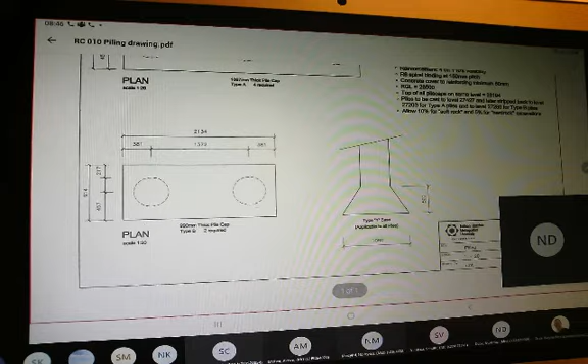No, it's not that one. No, I need to get into another one. No, I can, let me work with that. Let me look at that one. Okay, when looking at this drawing, I actually need to take that out and go out of this and share the other one. This is what new toys does, it messes with you so that you cannot do that. And now I will.

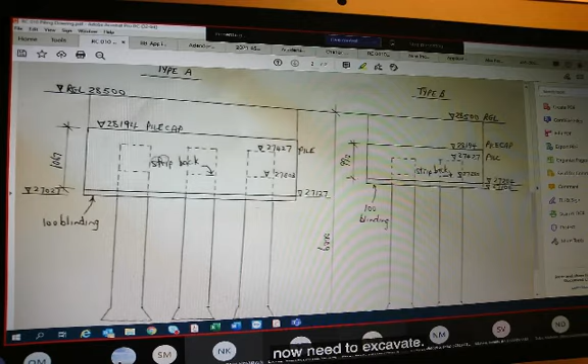And what I'd like to point out here is the fact that we now need to work on these pile caps. You can see the top of these pile caps, they are the same. The tops of these pile caps are the same, and they both reflect that they are at 28194. But I need to excavate for them, and I need to go down. If we have a look at the depth we need to go down, we'd have to go down from there, to the bottom of my pile, of my blinding that I need to excavate to. So in excavating to that level there, it means that I now need to do certain things.

We already stripped back our pile caps. So I now need to go to the bottom of that level of 27027 on the one side for the type A pile, and to the level of 27104 on type B pile. So when we're dealing with that, when we're now going to go and look into it and bring out our excavations that we have, that will then bring to us the section that we now have to go into doing our excavation, ensuring that everything that we have in there is.

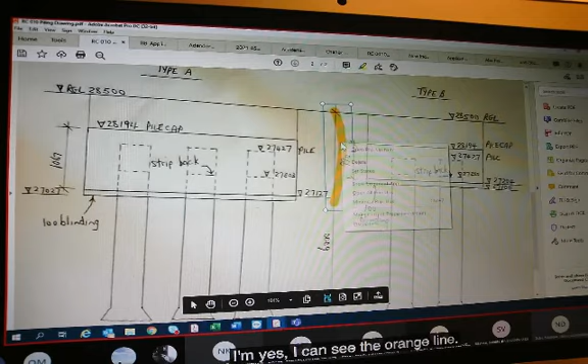Yes, sir. I can see the orange line from the ground level to the blinding. Okay, so you can see that, but you cannot see anything other than that.

But now when we're dealing with that, when we're having to work down and excavate down, we now need to determine what that depth is, and we will have to then say that it is the 28500 minus the 27104. That gives me a depth of 1396 that we now need to excavate down to.

That is for type B, and we have 1473 that we need to excavate down to for type A. And we will do that and show that in our drawing, as I just flip over into my dimensions, to say we need to go from there to the bottom there, and from there to the bottom there.

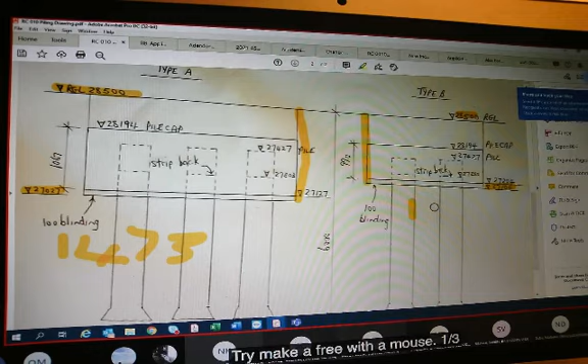And we'll say that minus that, and we'll also indicate by showing that it is that minus that. And our depth that we would have there for type A would be 1.473, and for type B, we would have 1.396. So that would be our excavation depth that we would have on the floor for the two types.

And obviously we know how many we would have, and then when we go out, I'm going to take that out and I would upload my Excel spreadsheet. I need to take that out and you can see my spreadsheet.

You guys can see my Excel spreadsheet? Yes, sir, we can see it. Okay, you can see my Excel spreadsheet.

So that is where, as you see, we excavate in earth for pile caps not exceeding 2 meters deep below ground level. It's important that we indicate that it's below ground level, and then extra over for excavation in soft rock, 10% thereof, and ditto for excavating in hard rock, 5% of whatever the excavated volume is. We need to allow for that.

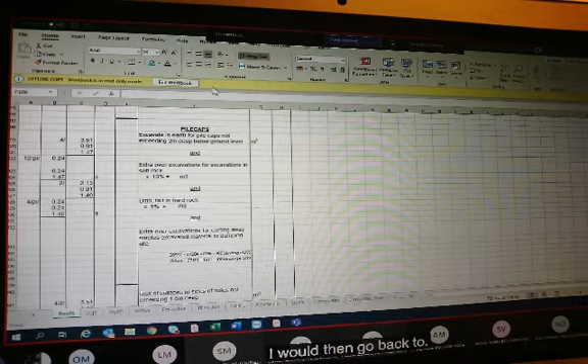Our dimensions that we would have here is, and that we would find from my drawings, which I would then go back to, then be from my drawing as I go back to my drawing. My dimensions would then be 3505 by 915, so it's 3.51 by 0.91, and the depth for my type A is 1.47, and I have 4 of those.

But at the same time, as we have a look at those pile caps there, let's have a look at those pile caps, and we also would notice that they now have been reduced. We've stripped them all back, as we can see over there. We've stripped them back, so we now also need to deduct that, and that is why we're doing this, we're going into the timesing column.

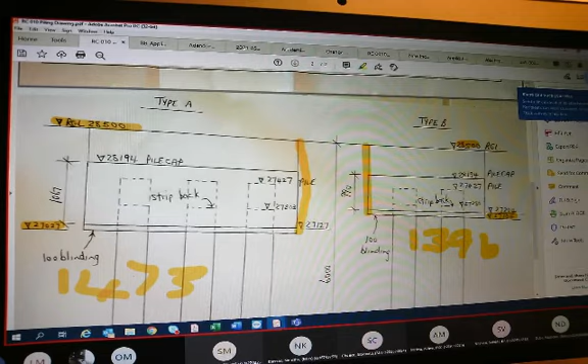Yes. I wanted to ask, why did you use the height of 1.47 when the pile cap only starts below that? Why did I use 1.47?

That's a good question. I've been asked that's why I'm saying these things, so that you can talk to me and tell me what it is that you are thinking at this point. So, what do you think? Is the 1.47 the height there? Is it correct, or what should that height be?

I think so. You must take the level that you've been given from the pile cap, which I can't see that. I think it's 27,427 to 27,027 to get the height that you're supposed to subtract by.

You say I should use 27,427 minus 27,027. Yes, sir. So you're saying it should be 0.4 and not 1.47.

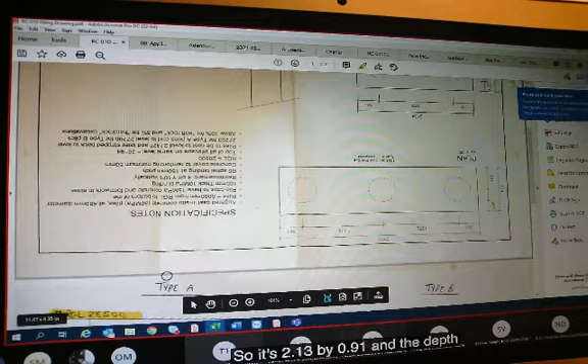And we also add, when looking at the sizes of the pile cap type B that needs to be deducted, we have those sizes as 2.134 by 0.914, so it's 2.13 by 0.91. And the depth that we've indicated there is 1396, but the 1396 is reflected as 1.4 as we write it to 2 decimals only, so that will be by 1.4.

And we will be deducting again the piles. It will be 0.24 by 0.24 by what's my next dimension now? It is 27,427 minus 27,104. That gives me 323. So it will be 0.24 by 0.24 by 0.32 times pi times 4, because we have two of those sets of piles as per the information given on the drawing, and that will be multiplied by another 2. So in total there will be 4 of those piles that we need to deduct.

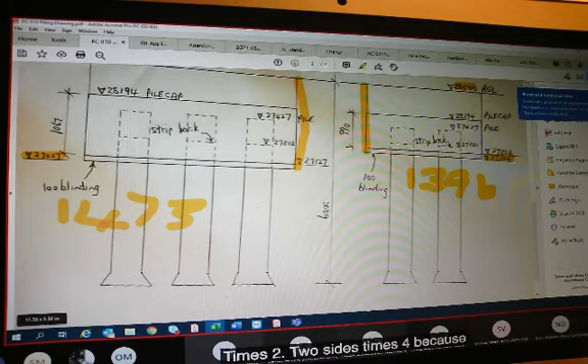And for these, we also now need to do risk of collapse for these pile caps. How will the risk of collapse be? If I have a look at my depth that we've ascertained, the 1473 and the 1396, we now have that. We need to do the risk of collapse to those. So my dimensions will be the same, I will not be interested in anything other than the depth that I've excavated, which would be 1473 and 1396.

So my risk of collapse would then be 3.51 by 1.47 times 2 sides, times 4, because I have 4 of those pile caps. And then 0.91 by 1.47 times 2 times 4. That is all for my type A pile cap. For my type B pile cap, it will be the 2.13 times 1.4 times 2 times 2, and 0.91 times 1.4 times 2 times 2.

So that was for my risk of collapse. All with me? Everybody with me? Right, I see there's a thumbs up, okay.

We then have one of our favorites, which would be my keeping excavations free from water, and that's measured as an item that we need to do.

So now I will have to measure the concrete that goes in there. As I look at that drawing, I can see there is concrete in there, and I see that the concrete is separated into 2 sections. One is blinding, and the other one would be my reinforced concrete. So it will be 10 MPa concrete, and whatever the size stone is that we will have, whether it be 19 millimeter, 13, or 25 millimeter stone, in blinding below my pile caps cast against my excavated surfaces.

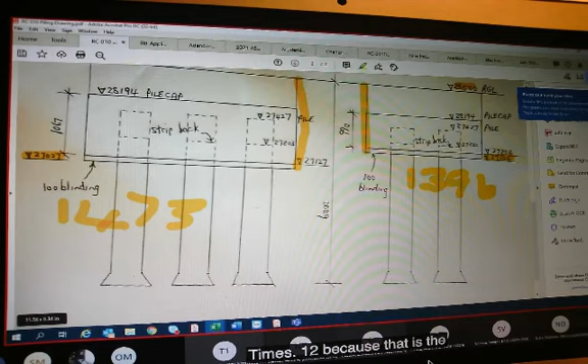My dimensions, I can do this in one of 2 ways. I can say 3.51 times 0.91 times 0.1, and I have 4 of those sections of blinding, but I will still have to deduct the piles that protrude through the section where I'll be casting the blinding, and that will be 0.24 by 0.24 by 0.1 times pi times 12, because that is the number of piles of type A that will protrude through my blinding.

I then also have 2.13 by 0.91 by 0.1, and I then deduct 0.24 by 0.24 by 0.1 times pi times 4, because 4 is the number of piles for type B pile caps.

In total, and with that, going with that is, I'll then also have to do my concrete. My 30 MPa 19 millimeter stone reinforced concrete in pile caps, partly cast against our excavated faces. Why partly cast? Because part of that is cast on top of my blinding that you see there.

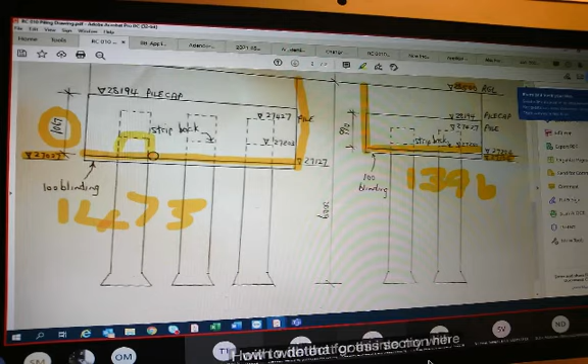And therefore, I'll be using the same dimensions that I had for my blinding. So it's 3.51 by 0.91 by 1.07. Where do I get this 1.07 from? It is given to me as 1067. When I now convert that to meters, and write it to 2 decimals, it will be 1.07. And there's 4 of those pile caps.

But I also have to deduct, for this section here where the pile goes into my reinforced concrete. That will be 0.24 by 0.24, and I need to determine what that height is. That height is given to me when I look at the levels. The levels would then be 27203 minus the top of my blinding or the bottom of my pile cap, 27127, and that gives me 76 millimeters.

So I will then multiply that by 0.08, what needs to be deducted. That height there is 0.08, and that is times pi times 12 of them.

The same token, I need to calculate the reinforced concrete in the type B pile. The dimension given to me is 990 millimeters, or 0.99. So my dimensions would be 2.13 by 0.91 by 0.99, and I have two type B pile caps, so my quantity for the concrete is times 2. I have to deduct the protrusion of the pile into my pile cap, which is 0.24 by 0.24 by 0.08, as it comes down to the same height that it protrudes through into my pile cap, times pi, times 4 of them.

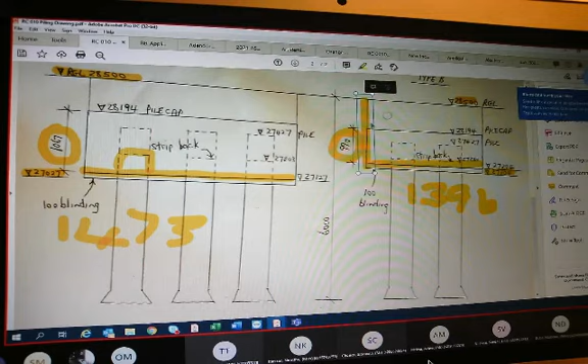Now, we said that when measuring formwork, we get different types of formwork we could measure. When I look at this drawing, generally when my pile caps show, they reflect that they will be exposed to the outside, because piles and pile caps are normally designed to go in areas where the footing or founding material will not be strong and firm. So this concrete would be exposed for the duration of time that the structure stands there. In most instances, we would measure for smooth formwork to the sides of the pile caps, because it would be exposed, and you'd want that finish to be aesthetically pleasing.

So when we measure smooth formwork to the sides of our pile caps, it will be measured in meters squared. In measuring that, we'd also look at back excavation of the vertical sides of the excavation in earth for working space exceeding 500 and not exceeding 1 meter 500 deep, for placing and removing the formwork to the sides of the pile caps flush against the excavated face.

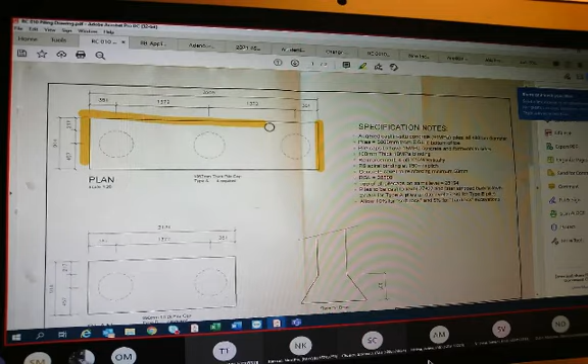What does that mean? It means that when we're looking at this from the top, that would have ground up against it. But we need to ensure that the formwork can get in there, that the support work goes in, and we need to allow for working space in order for us to get that formwork placed in there. That formwork would be going in at the bottom here, going down here. That formwork needs to go in on the side, and then we need to create working space for that.

And when measuring working space, we know that it's measured in meters squared. The standard system tells us it goes in exceeding 500, not exceeding 1 meter 500, exceeding 1 meter 500, not exceeding 3 meters, and that is how we measure for our working space.

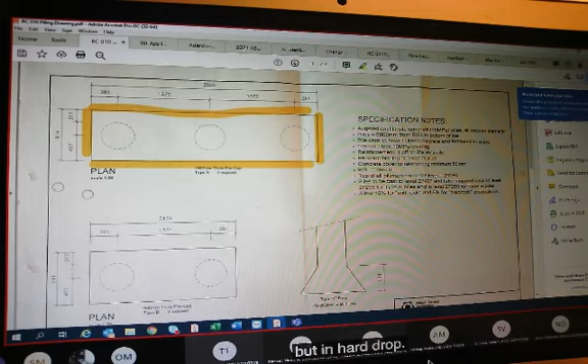We also have to measure extra over back excavation for working space for excavation in soft rock. Why? Because our instructions say that everything we do dealing with excavation, we need to allow 10% for excavating in soft rock and 5% for excavating in hard rock. So even when dealing with working space - what is working space? It means the contractor is allowing for his or her workforce to be able to safely work in that area, and we need to ensure it is allowed for. We know that 5% of the soil would be hard rock and 10% of that would be in soft rock. So we include that when we say extra over back excavation for working space for excavation in soft rock, times 10%, and ditto for hard rock.

Now let us have a look at our dimensions. Our dimensions tell me we need to measure for formwork for the 1067 and for the 990 over there. So it'll be 3.51 times 1.07 times 2 times 4, and 0.91 times 1.07 times 2 times 4 for type A. And for type B, we're looking at 2.13 times 0.99 times 2 times 2, and 0.91 times 0.99 times 2 times 2. That, ladies and gentlemen, brings us to the end of my dimensions for the measuring of the piles together with the pile caps for drawing RC010.

I'll now allow a couple of moments for us to ask questions and move through. Any questions? I don't see any hands.

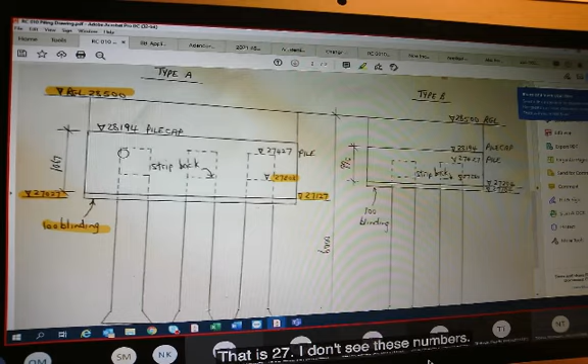Yes. So, sir, before that 100 millimeter blinding layer, so what is that? How do you think that depth? That is 27, I don't see these numbers. Can you not see my screen? Yes, can you, I don't see them well.

You see the level there is 28,500. That's a reduced ground level. Okay? Can you see this 27,027? That is in yellow. Yes, and then how did you get that one? I said 28,500 minus 27,027.

You punch in your calculator, punch in 28,500 minus 27,027. What do you get? 1473. Yes, sir, now that is the excavation depth, because we cannot fit the blinding if we've not excavated to below the level of the blinding.

Yes, I can see that. But I think I need to know, how did we get that 27027? That level is given to us. It's on the drawing. The level is given to us at 27027.

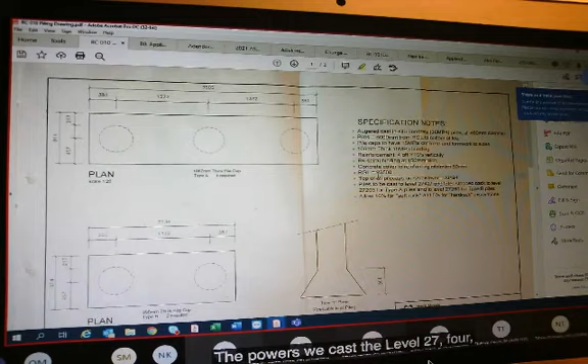27027. Yeah. Is it on the specification, sir? It's on this drawing that I've also uploaded, the one that you see here. I've also uploaded this onto the MS Teams. Okay, I think I'll go back and check. I can also, let me just...

If you have a look at what the drawing says, this is what we did. The piles we cast to the level 27427 and later stripped back. We're given that 28,500, which is ground level. It says that the piles are 600 millimeters from reduced ground level to the bottom toe.

Yes, okay. Right? And then, but we were also given, and here we say that the piles, that giving the level at the top of the piles for type A, and we are given those levels. That is for the piles only. Then the next drawing that we have, which I have also uploaded, is this one that shows where these levels come in. The details of all of those, it shows on there where we get those respective levels from.

All right, no, I can see. I thought that this one was just showing how these levels that are specified on the specification. No, the levels, this drawing was also given as part of the upload. Okay, no, I can see it now. Okay, thanks, so you have that now.

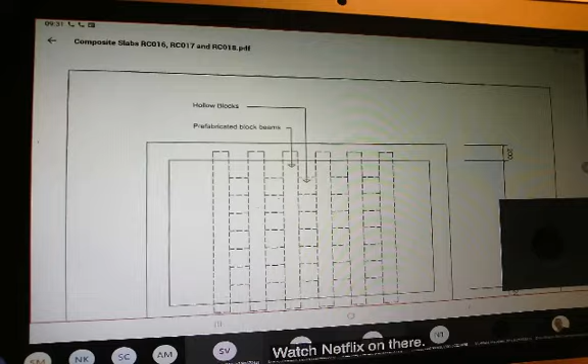That would take us into composite slabs. If you go into your MS Teams, you'd notice that I've uploaded a range of drawings and workings out that I'll show you quickly. You'll find it in files, in class materials, the first one at the top that says Composite Slabs RC 016, 017, and 018. If you open it and go in, you'll see there are hollow blocks, a drawing that shows rib and block slabs with the workings, also shows trough slabs with the workings, as well as hollow block coffered slabs with its workings.

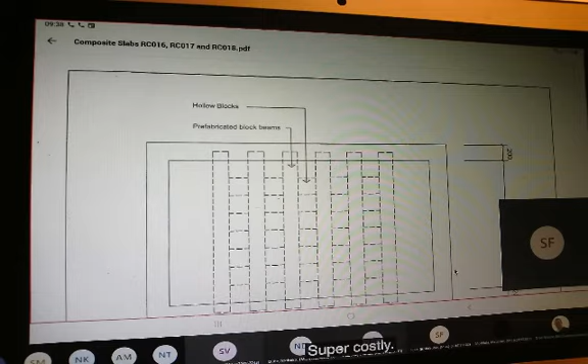Okay, right guys, I'm back. Before we start out with this, I'd like to know and check on this: do you guys, when you access YouTube videos from a link, use a lot less data than this live streaming? I wouldn't have a clue, but I'm asking because I'm trying to venture into doing something like that. Do you guys know, you don't use lots of data when you do YouTube streaming and that, do you?

Okay, because I'm looking at venturing into doing videos where you can see me, where you can see where I work through it all, and uploading them. I'm uploading the links for you to watch on YouTube. But I don't have much hope for myself with that, but it's something I'm going to try. I'm sure that I'm not too stupid as far as that is concerned, and I will try with the needed assistance.

I will try and do that. Okay, now we've done piles and the pile caps and the like, and now I'd like for us to have a look at composite slabs. But before I want to look at composite slabs, I think it's important that we look at what the standard system says. Now, you guys know concrete.

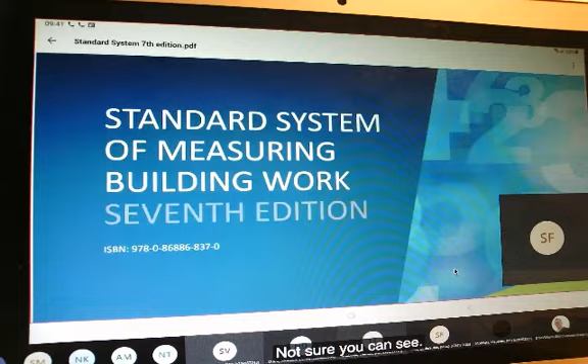You've been dealing with concrete in your third year, and you guys know the various aspects when it comes to concrete. You're aware of how concrete is measured, how it's measured in the different spaces. When I go out and try and upload the standard system here, I'm sure you can see. I upload the standard system, and we go to the section that deals with concrete.

Now we all know that we deal with composite slabs. You guys have all worked with rib and block slabs, I'm sure of this. Some of you might have worked with trough slabs, and some with hollow block slabs. Now, can anybody tell me the reason why we use rib and block slabs, coffered slabs, and trough slabs? Anyone want to venture a reason for using those? Anybody?

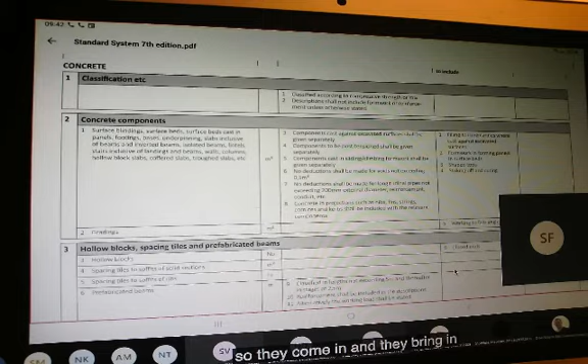If you look at the composition of a hollow block slab, or even a trough slab, or a coffered slab, you'll notice there is a lot less concrete being used. Concrete has weight, and concrete is also expensive. So they bring in hollow block slabs, trough slabs, and rib and block slabs to reduce the weight of our concrete, as well as to reduce the cost of that concrete.

For instance, if we have a 300 millimeter thick solid reinforced slab, it will be a lot more expensive than having a coffered slab, or even a rib and block or a trough slab. So we're using that to reduce some of the cost, and it also helps in some instances to expedite the curing process.

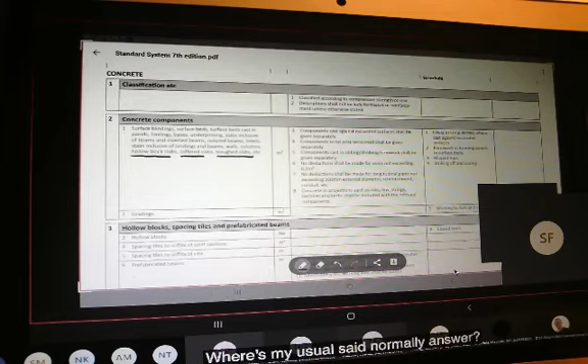So when we look at concrete, first off, we know that concrete is measured by its components: surface blindings, surface beds cast in panels, footings, underpinnings, slabs inclusive of beams and inverted beams, isolated beams, lintels, stairs inclusive of landings and beams, walls, columns, hollow block slabs, coffered slabs, and trough slabs.

Can you see the lines that I'm drawing there? Where's my usuals that normally answer? Yes sir, we can see the lines. You can see the lines that we've drawn there.

Now you can see that they mention these slabs separate to the one that shows slabs inclusive of beams and inverted beams. So when we measure them, we will not include them in the same description as a slab of a concrete structure that we would have done in third year. So we measure them separately. It is measured in meters cubed, and the components cast against excavated surfaces and so on. We'll go through all of those in the same manner.

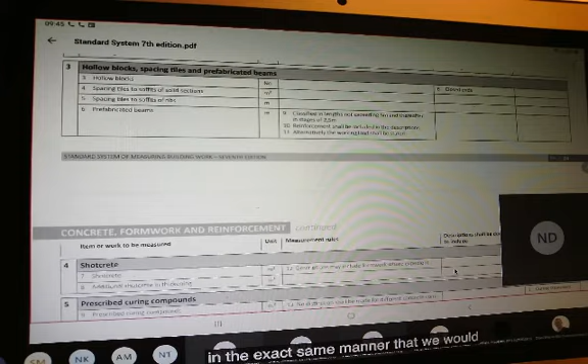So when we now go through and look at our respective sections of concrete, we know that it is measured in meters cubed. We need to indicate them separately, show each one on its own, and the rest of those would also work in the exact same manner as for our normal concrete slab.

But when we look at the rib and block slabs, we need to measure our ribs separately. We need to measure the blocks separately as well. This is where we come and see that it shows our hollow blocks, where we have our hollow blocks, we have our prefabricated beams.

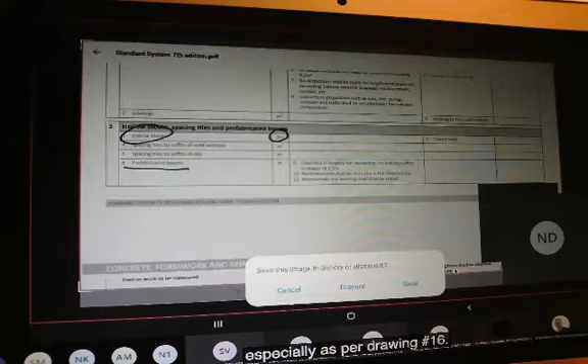We see that the hollow blocks are measured in number. The spacing tiles to the soffit of the solid section is measured in meters squared. The fabricated beams are measured in meters. Now I'm going to go into this, and there are different sections that we need to take note of when we deal with our rib and block, as per drawing number 16, which I will be opening.

This will now be drawing number 16. In drawing number 16, let's have a look at this. The next couple of drawings, 16, 17, and 18, are just a small scale. If you look at the overall dimensions, you'll notice the dimensions are now 3 meters by 2 meters. It is just a schematic to show how we would go about measuring these respective slabs, before we go into the next section that will be a little more intricate.

So when we look at this, the drawing shows us that we have a 3 meter overall by 2 meter overall. And what that shows us further is the dimensions and how this is indicated to us.

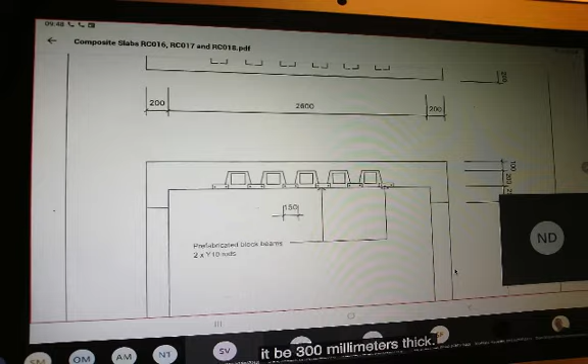We have 100 millimeter above my block. We have the block of 200 thick. And then we also have the ribs at the bottom there, and the rib widths are 150 millimeter. As part of the prefabricated block beams, it tells us that it has 2 by Y10 rods running parallel with the beam or the rib. As I said, my overall dimension, the thickness of my slab would be 300 millimeter thick.

And what else is there that we can see? You can see it shows us where the hollow blocks are and where the prefabricated block beams are given to us. This is what I want us to take note of. Take note that those are all my beams, and these over here are all my hollow blocks.

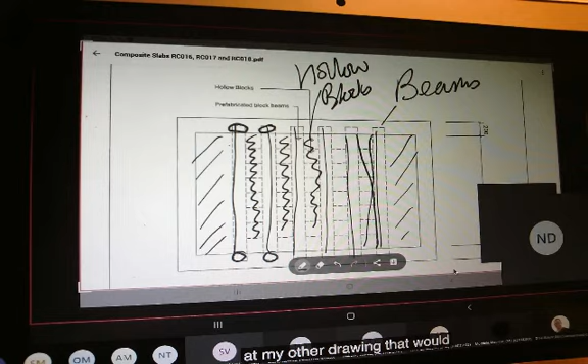And what's important, you notice that the beams sit over the concrete beams on the end, but the blocks just sit between the concrete beams. And what we have here, it means that the remainder, this here - what would that be? That would be, if I look at my other drawing, that would be part of the solid concrete. Can you see all of that?

You see all of that? You can see it's part that will be part of the solid concrete. And how do I know that? I see that over here, because what I've drawn with those diagonal lines, that's where the solid concrete goes.

Okay, we got that. So when we measure now, we will end up measuring the soffit of the slab through there, and we will have to deduct everything from there to there. Can you see that? And what will we use? We will use the dimensions of each of the blocks together with dimensions of each of the beams.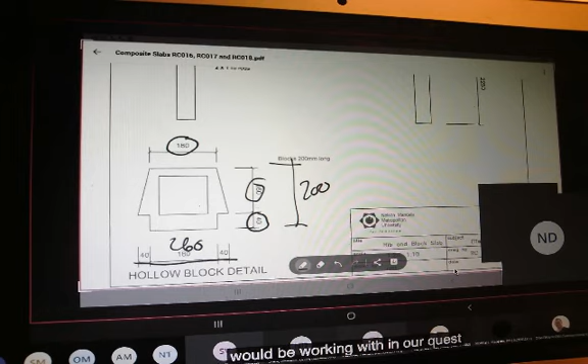As I go through, and I clear that again, I'll need to move up, and there you'll notice that I'm also given the dimensions of my hollow block, the details of my hollow block. That shows the thickness, which becomes very important. It shows the dimensions, the overall dimension of 200. It also gives me the 180 versus the 260.

That's all dimensions that we will be working with in our quest to calculate or to measure the volume of the concrete that needs to go into the slab.

I've also been given the dimensions for my ribs, the width for my ribs, and the height is given to me. Where's the height given to me? The height is given over there, as that 40 mil there, because what would happen here is

my beam would sit there with my next block sitting over there. That'll be my beam sitting in there. That is why I say that the depth of the beam would be 40, and the width is given to us as the 150 millimeter.

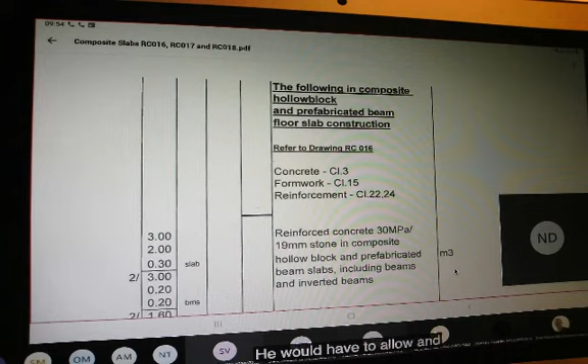All good. Right. Now when we go and when we measure this, we say the following: in composite hollow block and prefabricated beam floor slab construction. Immediately when we get in there, we're telling the contractor that he must price this, that this is going to be composite hollow block and prefabricated beam floor slab construction. We're telling the contractor that this will not be a solid reinforced concrete slab, that he will have to allow and think outside of that.

So we say reinforced concrete 30 MPa, 19 millimeter stone, in composite hollow block and prefabricated beam slabs, including beams and inverted beams.

Okay, so when I look at my drawing, when I go back to my drawing, we will now measure there to there to there and to there, because we are measuring over everything. That is how we were taught. We measure over and then we come back and we do whatever deductions we need to do.

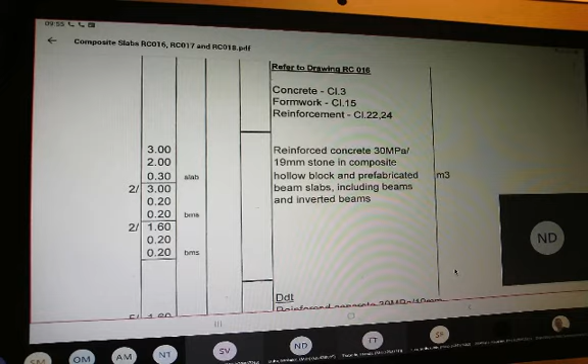Right. So reinforced concrete 30 MPa 19 millimeter stone in composite hollow block and prefabricated beam slabs, including beams and inverted beams. My dimensions there, as I said, is 3 meters overall by 2 meters overall by 300, which is the thickness of my slab.

And then for my beams, I measure my beams there as 3 meters by 200 by 200. Where do I get that? I get that over here, my beam detail. If my length is 3 meters across, it tells me there that that is 200 and my width is also 200. Tells me that my width there is 200 and that my height is 200 as well.

On top of that, I have my 1 meter 600 multiplied by 200 multiplied by 200, and I have 2 of those, 2 of each: 2 of the 3 meter beams and 2 of the 1 meter 600 beams.

Okay, all good with it. I'm glad some people are showing me a thumbs up, and I can see that there's an understanding of what goes on here. Okay, so we have that.

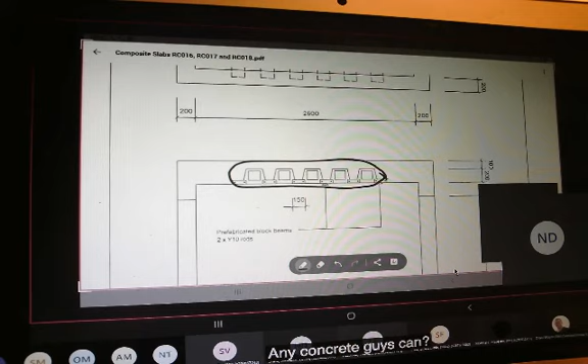But when we look at this, when I look at my drawing there, I can see that what I've measured now is an overmeasure. It's an overmeasure because I now need to, at that section there - that section will not have any concrete.

Guys, can we just pause there? The cardiologist is phoning me. I'll just need to pause quickly.

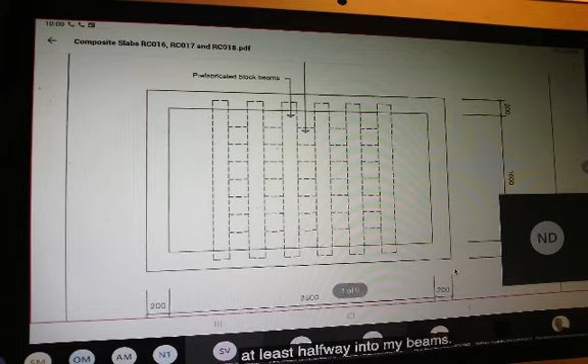We said that we're using this to use less concrete and to also reduce some of the weight of my slab. So when I go in and I deduct, I now deduct reinforced concrete 30 MPa 19mm stone in composite hollow block slab with prefabricated beams, including beams and inverted beams. And I'm going to look at, and we're going to now determine the dimensions of each and everything.

But before I do that, I want for us to again have a look at where the slab sits, or where these beams, these prefabricated beams, sit. You see that they sit halfway, at least halfway into my beams, all of them - 1, 2, 3, 4, 5, 6 of them. All 6 of them sit about halfway into that beam. And my blocks, we will now look at how we determine how we arrive at whatever dimensions they speak of. I will first of all deduct the blocks.

Now we look at the shape of those blocks. What shapes do you see for those blocks? I hope that this helps that you can see what it is that I'm writing and trying to show. What shape do you see there at the top? What shape is that? A trapezium, right? And what does it mean?

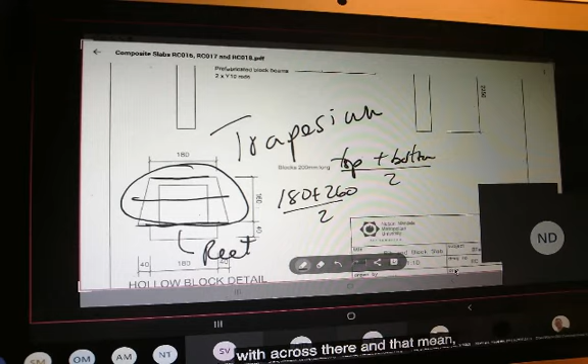When I need to determine the area of a trapezium, what do I say? That plus that - I say the top plus the bottom, and then divided by 2. Okay, all agree with me? Because I need to deduct something. And at the bottom there, I have a rectangle.

So what I need to do here, I've got 180, so I have 180 plus 260, and that divided by 2. And I will then have the mean width across there, and that mean or average width across there would therefore be - it's 440, so that is 220. Is that correct?

220, and that I will then multiply by the length and multiply by my height of 160. For my rectangle, it will be 180 multiplied by the 40 multiplied by my length. So that's what I need to deduct. I need to deduct, and let's go and see where that goes in.

So I need to deduct for my blocks. We say that it's 1.6 - across that 1.6 I get from there. 1.6 I have is given to me over there. 1.6 is given over there, and that gives me the length of the blocks that I need to deduct. So it is the 1.6 multiplied by 0.22, which is the mean that I've already determined.

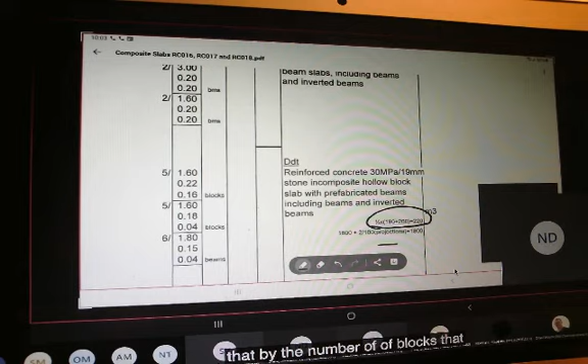And there is that mean over there - that is half of 180 plus 260 gives me 220. So it's the 1.6 times 0.22 times 0.16, which is the height. And then we multiply that by the number of blocks that we see there.

1, 2, 3, 4, 5 of them. It will be 5 that we see. You can see the blocks over there - it is 1, 2, 3, 4, 5. That is the 5 of them that we have in our total.

And whilst we're looking at that, I'm now going to look at the deduction of the beam. I'm not done measuring the block, but I'm just going to show the beam. It will be 1, 2, 3, 4, 5, 6. All understand Roman numerical - so that is there, but just so you can see for future, for where we're going to now.

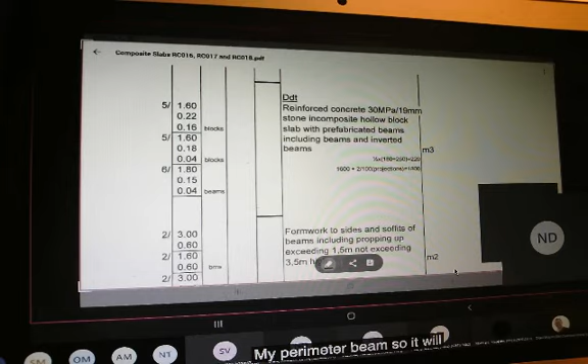So when I now go and look at my reduction, I've got my blocks - I still have 1.6 by 0.18 by 0.04. It's a 40 millimeter thick bottom part of the block, times 5.

And then now for the beams, how do I get to the beams? We said that the beams we're looking at calculating go just about halfway into my beam, my perimeter beam. So it will be the 1 meter 600, plus 2 times 100 - that is twice into the half of the beam, because the beam is 200, so half of 200 gives me 100 on either side, and that gives me a length of 1 meter 800. That's 1 meter 800 times the 0.15 times 0.04 times the 6 that we've ascertained there. Okay, also good.

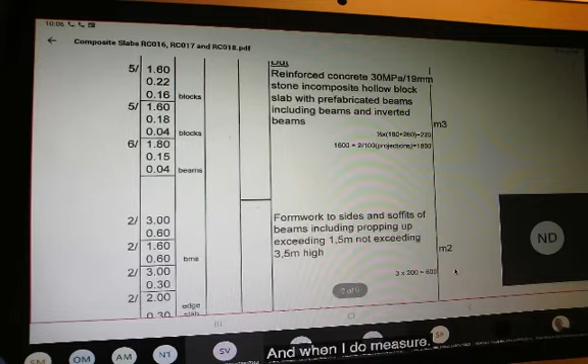Then look at the formwork, and this is what I discussed earlier when we said when I started analyzing my drawing and what I do as to where the solid sections would be, where we would have to deduct. Now my formwork - I need formwork to sides and soffits of my beams, including propping up, exceeding 1.5, not exceeding 3.5 meters high. Where do I get that from? I look at my height - my height is given to me as 2250 to the underside of the beam.

To the underside of the slab, it is 200. That tells me it falls in the category of exceeding 1.5, not exceeding 3.5 as per the standard system. I need to measure, and when I do measure my formwork, I have my beams along the perimeter there.

That would be 2 times 3 meters times 0.6. Where do I get the 0.6 from? I get it from the sides and soffits of beams. Say that's a 200 plus a 200 plus a 200. That gives me 600 girth.

When I look at my length, I say that it is 3 meters times 0.6 times 2. That is for my opposite sides. And then I have 1.6, 0.6 times 2.

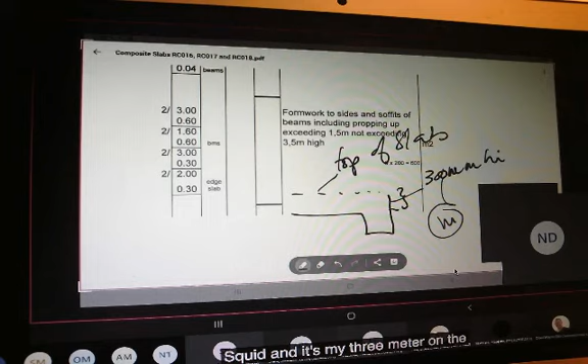It is then reflected as 300 millimeters high. But the standard system still tells me that if it does not exceed 300 millimeters high, or thick, or wide, it is therefore measured in meters. Now 300 does not exceed 300 millimeters, but 300 is on the dot there.

So we will measure that, but this is not part of edge of slab. It actually forms part of the sides and soffits of beams. That is why it is measured in meters squared. And it's my 3 meter on the outside multiply 0.3 times 2, and 2 meter on the outside multiply 0.3 times 2.

And that comes, and that is on the outside there. That is where that is reflected. The section that says it's edge of slab actually is sides and soffits of beams. Okay. All with me? Yeah, more - I don't see any hands.

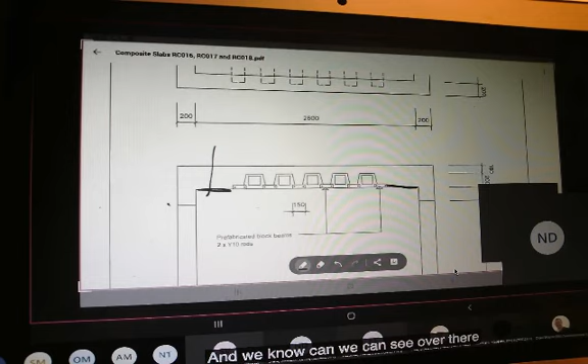We will now look at formwork to the soffits of the adjacent flush surfaces of the hollow block slabs, exceeding 250 not exceeding 500 millimeters thick. Composite hollow block slabs including propping up, exceeding 1.5 not exceeding 3.5 meters high.

What does that mean? It means very straightforward. When I have a look at my slab here, at the section of the slab, it speaks to - as I said earlier - we do have the section where there is no hollow block. And we know, and we can see over there, that it has a thickness of 300.

And the standard system tells me that formwork to soffits of slabs are measured as not exceeding 250, exceeding 250 not exceeding 500. The reason for that is it becomes a lot more costly and our supports will have to be a lot closer to one another the thicker the slab goes. So we're measuring for this section there, for the formwork to that solid section, and in measuring that we can determine what the dimensions for that would be.

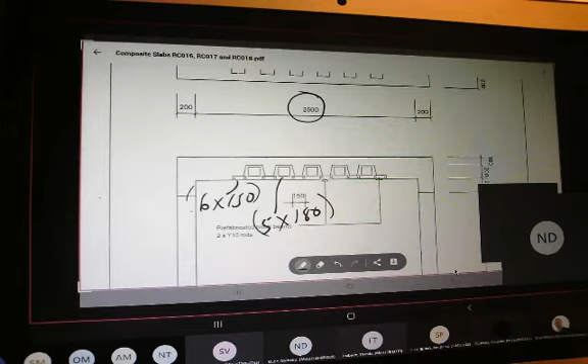And we take the inner dimensions of 2 meters 600. I want to show, we take the dimension of 2 meters 600. And we have 6 by 150. Right? We have 6 by...

Guys, have I been muted the whole time here? Did you not hear anything that I've said here now? Have I been muted the whole time? Yes, sir, yes, sir - and nobody says anything, and you can see me writing and all of that. No, don't believe this. Today's not my day. So where was the last that you guys were with me? Can somebody tell me where the last was that you heard me?

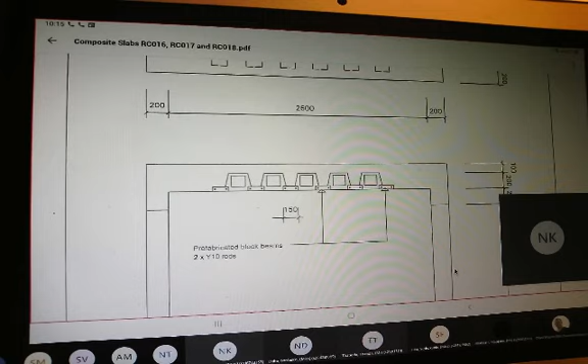When you were explaining the 3 meter by 0.3. When I was explaining which one? Nomta? The 3 meter by 0.3, I think it's formwork. So the last time you were with me was when I spoke of that section there, where I said it was the 3 meter times 300. Is that the last one? Yes, sir. So that was when I spoke of the sides and soffits for beams.

Oh my word! I cannot believe that I did not unmute my mic, and I expected you guys to speak up and tell me. You could see me writing, you could see the screen moving, but you did not think of telling me that I'm muted. Sir, I just thought that the video was lagging. You just thought the video was lagging. No, please guys, next time interrupt me and tell me, because now I've said so many things that I think I've forgotten what it is that I've said. So we spoke of...

Was it that one there? No, past that. A bigger one? Past that. No, it cannot be past that. No, it's that one. Sorry, sir.

It is the formwork, to sides and soffits of beams. Yes, sir. Okay, where I had that.

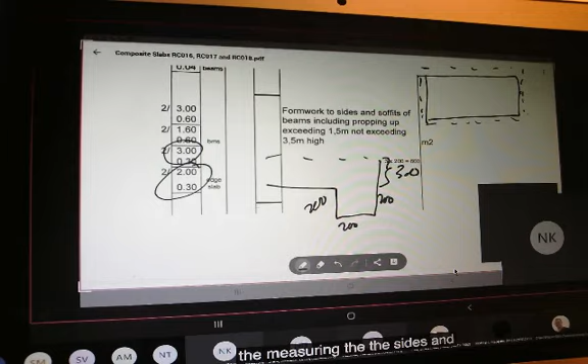And I said that there was 300, that one. Yes, sir. And that's where I arrived at that. And I also showed that it is made up of that, and that is where my 2 by 300 goes there, and the 2 by 300 and the 3 by 300. That's it. Okay. But you do understand the gist of what it is that I've measured there - measuring the sides and soffits of beams, and including that in the overall dimension, and that is that over there. Okay? So you've got that.

Okay, so when I look at, and I'm going to go back to this one now again, when I look at the formwork to the soffit of the adjacent flush surfaces of the hollow block slabs, exceeding 250 and not exceeding 500 millimeter thick composite hollow block slab, including the propping up and exceeding 1.5 not exceeding 3.5 meters high. That refers to, as the standard system says, any slab that exceeds 250 but not exceeding 500, we measure them in those separate sections or categories.

The reason for that is that we will now have to increase the number of supports because my slab gets thicker, and when it gets thicker, it means it gets heavier. So we have to now measure them in those respective categories, and we also need to determine how we arrive at them. And when I look at, I'm going to get back to that, where I was to my drawing, to show where that takes effect.

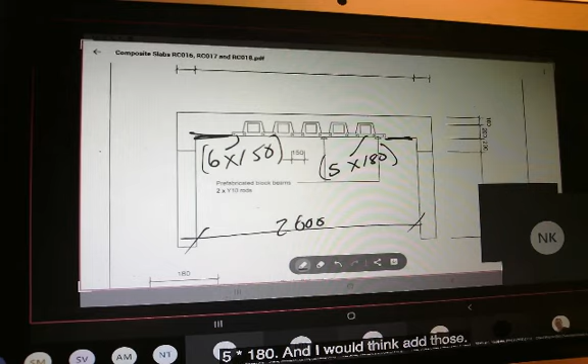It takes effect over here, and that description that we have there speaks of those two sections that I've colored in there. And in order for me to do that, I now need to take my dimension on the inside, which is there, and that gives me 2 meters 600.

And I see that I have 6 of 150, that will be the beams, and I have 5 times 180. I would then add those to one another, and I'd say 2 meters 600 minus those two - let's say that 2 meters 600 minus those two - to determine what that length there would be on either side.

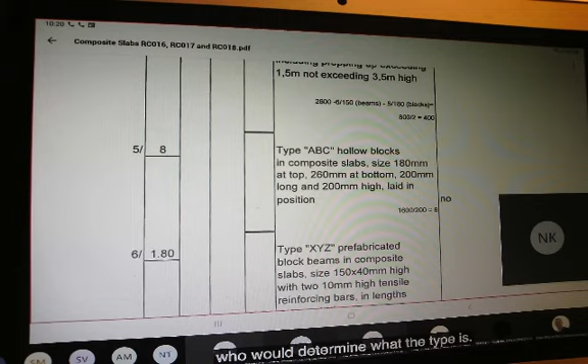So looking at my dimensions now, I can say that it is my 2 meters 600 that is shown to me. My 2 meters 600 minus the 6 by 150, minus the 5 by 180 for my blocks, and my dimension there, therefore, is 800 in total, and divided by 2 gives me 400, and that's 1 meter 600 multiplied by 0.4 times 2. That is for the solid section on either side of my rib and block slab.

I also have here my type of blocks. Now, we normally get given the types of blocks that we will be using, and the different types of blocks are given with their respective numbers dependent on the depth of the blocks, dependent on the thickness of the blocks. And all of those would determine what the type is. This is now just given a general type ABC, hollow blocks in composite slab, size 180 at the top, 260 at the bottom, 200 millimeter long - that is each block 200 millimeter long - and 200 millimeter high, laid in position.

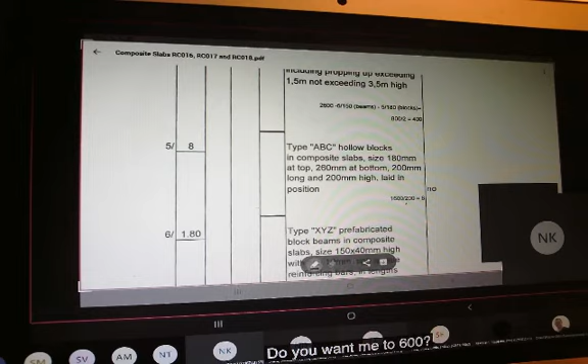So what that refers to is, as we can see, yes, there it is on section. There we have a hollow block detail that shows the 180 at the top, it shows the 260 at the bottom, and it shows the 200 in height. Now that does not show the width, but the width we will get based on the type, and the type will normally get that from the block manufacturers, whereby we would say - but we could go in and we can see over here clearly where all these blocks are shown and how they would be placed across there.

So when we measure, we know that the block sits in between, and the blocks with length of that would be 1 meter 600. So the type of blocks, effectively saying they are 200 millimeters long, we can go in and we can see over here that it tells us that the length of where my blocks would go in, the 1 meter 600, divided by 200, because 200 is given to us as part of the specification, means we would have 8 blocks per row. And we have 5 rows, and that is 5 times 8. Okay?

The same with my precast or prefabricated beams, it's type XYZ - just given to XYZ. Different manufacturers have different codes that they call these. As QSs, we will communicate with these manufacturers and ask what do you call them, what's your type, what is all of those? And we use the information they give us to draw that up.

We'll say prefabricated block beams in composite slab size 150 by 40. I've shown previously where we get those dimensions from - the 150 was given to us, and the 40 we get at the bottom of the block, where the block has a lip, and that is where the block will sit on the beam. That is 150 by 40 millimeters high, with 2 10 millimeter high tensile reinforced bars in lengths not exceeding 5 meters.

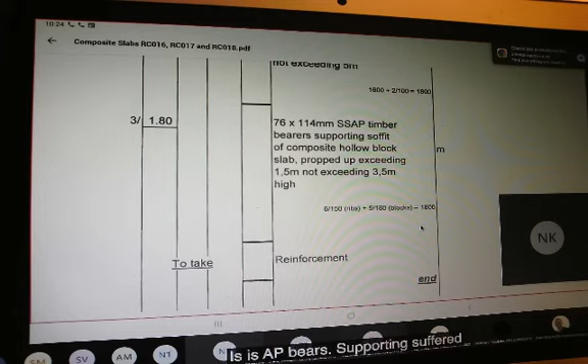Now where did I get that 2 10 millimeter high tensile reinforced bars from? It's also given to us on the drawing. It tells us it's prefabricated block beams with 2 by Y10 rods in them, not exceeding 5 meters.

What's the length? We've already determined the length of my beam, my apologies. And we know that we also determined that there are 6 of them. So it will be 6 times 1.8.

Then move further and I say 76 by 114 SSAP bearers supporting soffit of the composite slab, hollow block slab, propped up exceeding 1.5, not exceeding 3.5 meters high.

What on earth is that? Where on earth are you talking about, sir? Talking about 76 by 114 timber bearers. What is a bearer? A bearer is something that supports or carries a structure on top.

It's like when we do a floor slab, a timber floor slab, we have bearers that carry the joists, that carry the flooring boards. In this instance, we have bearers that will carry, and we will need to determine what that length is. And where are we talking about? I'm going to show...

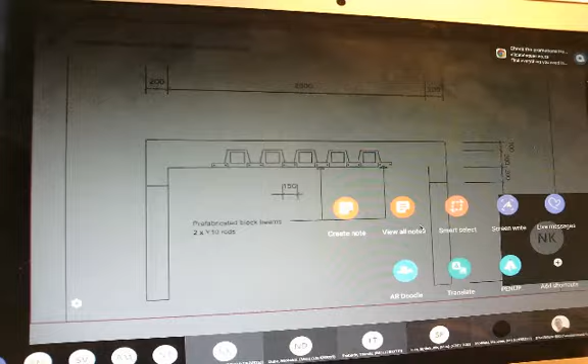I think it's best if I show it over here. The bearers that we're speaking of, guys, would be in support - the bearers over there that will be supporting the slab, especially over there. Bearers will be supporting there to prevent that from sagging.

So I need to determine what these lengths are. What are the lengths of what there is? Remember that in quantity surveying we measure net. We measure net, we do not allow for waste, we do not allow for laps, we don't allow for that. We measure net. So we will measure - you say it is 6 by 150 ribs.

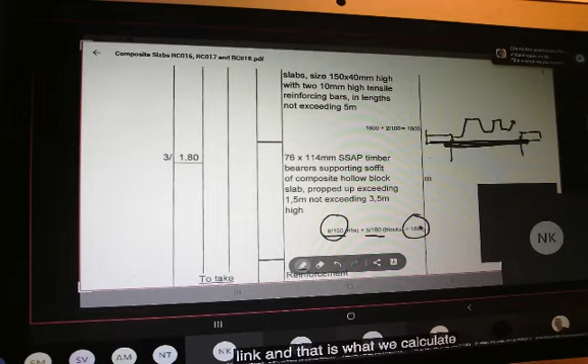And we add 5 by 180 blocks, and that gives us a length of 1 meter 800. Even though when it gets placed, it will be placed beyond the solid sections, even though it's placed beyond, we are not concerned with that because we measure the net area, we measure the net length. And that is what we calculate by saying 6 by 150 plus 5 by 180 in order to ascertain that there.

All with me? Right, I know we all are with me because this is very straightforward. It's not difficult at all.

And then you say reinforcement to take. What does to take mean again? We'll check next time, I've forgotten what to take stands for. Somebody please remind me. Nobody knows what to take stands for. To take means that we will be measuring the reinforcement again at a later stage.

Okay, that is drawing 16, rib and block slab, very straightforward. I'm now ready to field questions before I move on to drawing number 17. No questions? Fine, can I proceed? Yeah, so silence means yes, thank you very much.

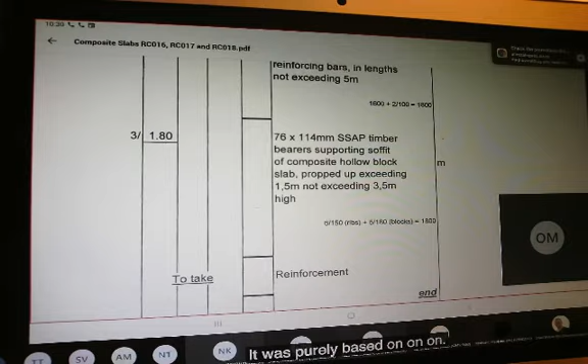Sorry sir, can you go back to the bearers? To the bearers. How did you get the number of bearers? The number of bearers, we looked at the width there of Odwa.

We normally place our bearers at 500 centers, and it was purely based on how we see it and placing the bearers at those centers so that we can ensure that we would not be falling foul of it sagging, but we generally would look at about 500-600 centers and measuring them and taking it from there.

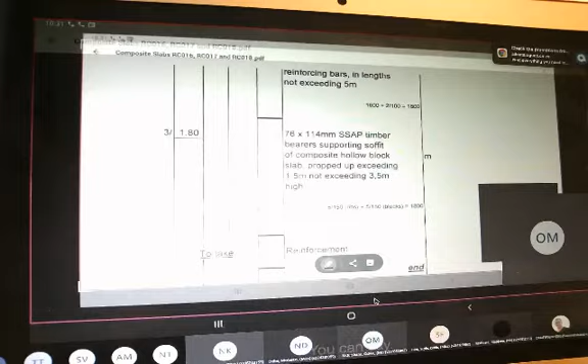But not less, you can work with about 600 centers. You get 2 and 2/3 spaces, so working with that you should be safe. But even if you work at 500 centers, 3 spaces means 4 spaces, and then you have your three bearers in there. As I say, when you're dealing with that, you can say 500 to 600 spaces.

I trust that answers your question, Odwa. Yes it does, thank you sir. Okay, you're not, right. Any other questions? Nothing. Okay, I'm going to look at the next drawing.

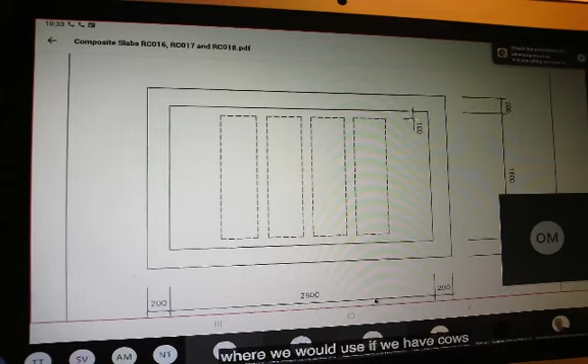So the next drawing is exactly the same size as the one that we've just done, but of course there is a difference. There's a difference in the sense that when we look at the drawing, we notice that instead of ribs and blocks, we're now sitting with trough.

If you're going to have a look, those of us who know what a trough slab is, who comes from the farm knows a trough is basically where we would place feeding for cows or any fodder for them to feed out. The same principle is applied here. This trough is one section that almost looks like a bath, turned upside down, and forms the formwork to the slab.

And if we look at this here, at the section, this trough, we should just come out there. You can see there the shape of that trough. It's like an upside down bath.

And those are solid sections. These here would be hollow, and we'd have the solid concrete. That will be the solid concrete.

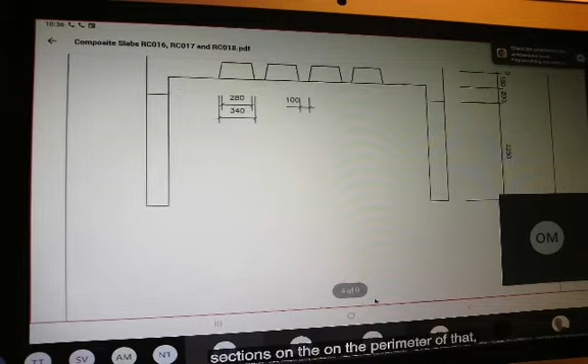A partial, what's the term I'm looking for? Not for a, what's that shape? Prismoidal, not a prismoidal shape. I cannot think of the shape now. It'll be like not a pyramid, but a partial pyramid, a non-square partial pyramid, and that is the shape that we would have here.

So when we look at this, that is what we have. Again, our solid sections on the perimeter of that, and when we measure this, slightly different, but we start off with the same principle. So we measure and say the reinforced concrete 30 MPa 19mm stone in trough slabs, including beams and inverted beams. We measure our dimensions overall. Our thickness is still the same, the 300, so it's 3 meter by 2 meter by 0.3.

So for the slab, the beams will go the same as we've done for the beams in the rib and block slab. Exactly the same, the 3 meter by 0.2 by 0.2 and the 1.6 by 0.2 by 0.2, both multiplied by 2 as we have the 4 sides, 2 shorter sides and 2 longer sides.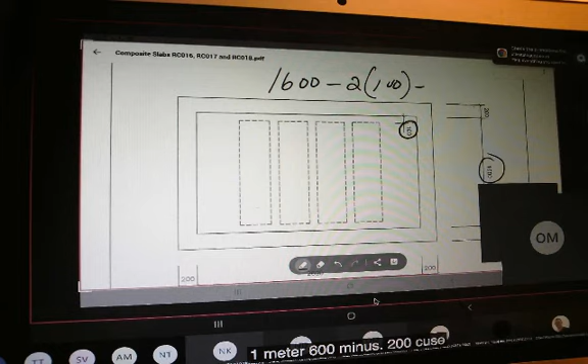And then we deduct the concrete 30 MPa 19mm stone in the trough slabs, including beams and inverted beams. Looking at the troughs, I see now on my drawing that my dimension from there to there is 1 meter 600. But I also notice that I have 100 millimeter on either side of my trough.

Meaning that it is 1 meter 600 minus 2 by 100, which gives me a length of 1 meter 400. I've got the height of my trough, given as 180. The width of my trough at the top is given to me as 280 and the bottom as 340.

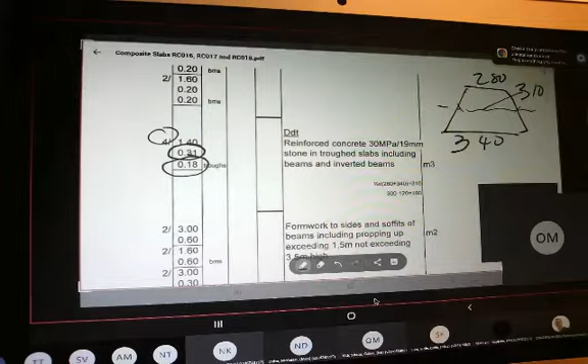All dimension sizes that I have to take into account when determining what I need to deduct. When I take that into account, I have a look at 280 plus 340 and get half of that. Because 280 plus 340 gives me 620, and half of that gives me 310. So the 310, where I have that, gives me my 310. The width across there is 310.

That 310 is there. The 1 meter 400, I've already ascertained the length of 1 meter 400, and I know that that is the overall length of my trough, and my height is 180, and how many of them are there? I have 4 of those. That's what I deduct.

I move further and look at the formwork to the sides and soffits of my beams, using the same principle I measured for my rib and block slabs. It's the exact same dimensions I've gone through, which I explained previously, so I won't explain that again here. For the beams, the sides and soffits of the beams to the edge of the slab - we've done that.

So we now look at the formwork to the soffits, the formwork to the bottom of this trough slab. This is formwork to the soffits of the trough slab exceeding 250, not exceeding 500 millimeters thick, with 100 millimeter wide ribs.

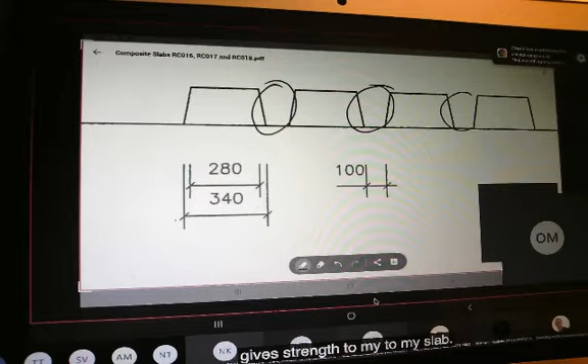Where do I get that? As shown to me on the drawing, my ribs are 100 millimeters wide, so my ribs would sit there. What ribs? Are they prefabricated ribs? No, they're not prefabricated ribs. It is the beam or the rib that is being formed by the formwork to these troughs. It now creates that beam, because we now have a beam that is formed there, and that gives strength to my slab.

So you're now saying that the formwork to my beams at 100 millimeter wide ribs at 440 millimeter centers, including propping, exceeding 1.5, not exceeding 3.5 meters high. Now where do we get those centers from? Those centers would be given to us by the engineer. The engineer would tell us that the centers of these would be at that.

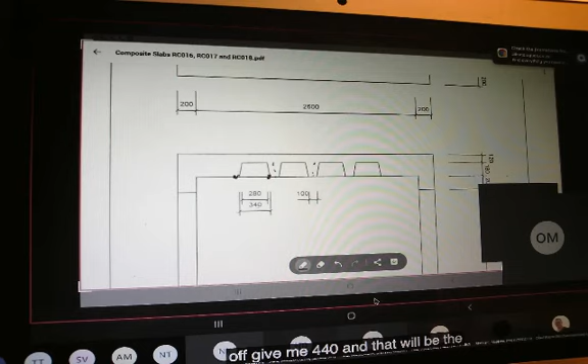But also, you also get that from my drawing, from the drawing that also shows my trough. Now how do I get that? From my trough, because the beam of 100 millimeter that is formed there indicates that we will have to at least have something in between there. And if I look at my trough of 340 millimeters...

I look at my trough of 340 millimeters - that 340 millimeters would be to there, right? So we add the 50 on either side, and that is how that is made up, being at 440 centers, because the 340 plus 50 gives me 390, plus the 50 on the other side of the trough gives me 440. And that will be the centers that I would be placing these at, the 440 centers indicated to me over there. I hope you understand what it is that I've just said.

Also given to us is the 440 centers. It is the 340, which is the beam size or the trough size, plus 2 times half times 100. If I can draw the trough, that is 340. So we're going halfway into my 100 on the other side - that will be 50, and that will be 50. It means that overall they are at 440 centers.

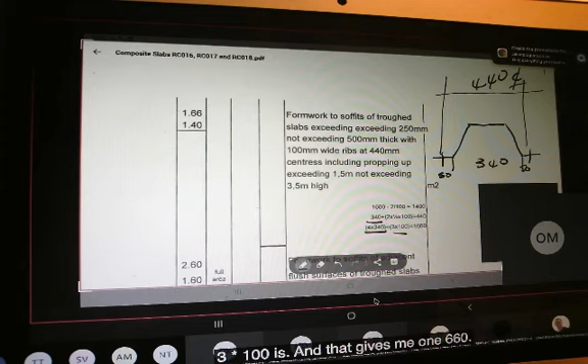Brother, you've got the length of them, 1 meter 400, and we now need to determine exactly how much and how far it is that we need to measure with this. We have the 1 meter 400 of the formwork overall, and we need to determine - we see that we have 4 of these troughs at 340, plus in between we have 3 beams of 100 millimeter wide. So it will be 4 times the 340, which is the 4 troughs, plus 3 times the 100, and that gives me 1660.

And what does that refer to? Where does that refer to? What is the formwork that we're speaking of? The formwork that we are referring to in this instance would now be, ladies and gentlemen, would be there. That's the formwork being referred to in that description we've just spoken of, because we are telling that the support should be for these troughs, to hold these troughs up, saying that the beams are at 440 centers, the beam widths are 100 millimeters wide, and it will support a trough of 280 by 340.

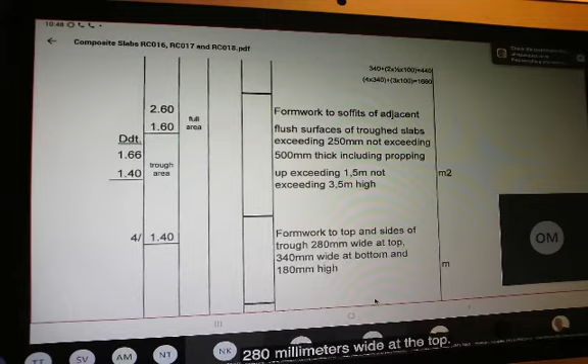Now we're taking an easier route here. We can, of course, go measure the sections individually, but it's easier for us - we've already measured the troughed area, so we take the overall area and deduct the troughed area which we've already measured. And that gives us the area of where my solid concrete would be placed.

And I've got formwork to the top and the sides of the trough, 280 millimeters wide at the top, 340 millimeters wide at the bottom, and 180 millimeters high. Now what on earth does that talk about? Formwork to the top and the sides of the trough, 280 millimeters wide at the top, 340 millimeters wide at the bottom, and 180 millimeters high - what do you think we're talking about there? Anybody? Anybody want to try and think what it is that we are talking about here?

No one. I also don't know. Nobody wants to take a chance on what it is that we're talking about.

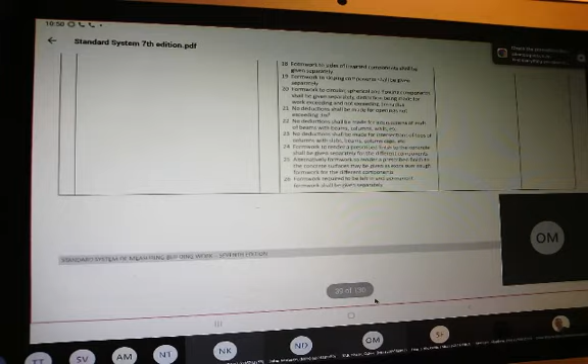What I'm going to do is go back and quickly take us to the standard system.

Sir, I can't hear you. No, I'm in the standard system. Can you see it? Yes, sir. I'm searching here for the section that speaks to formwork to troughs and that.

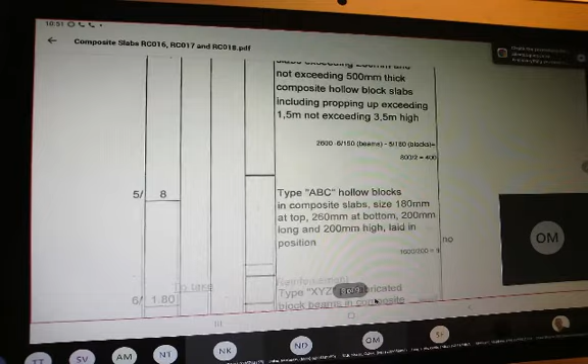Okay, if you have a look over here, it tells us that additional formwork to troughs of composite prefabricated beams and trough slabs are measured in meters. Right? That's additional, the troughs of composite slabs. So this is what we are now looking at measuring here.

When I just get back into it, our description says formwork to the top and the sides of the troughs, 280 millimeters wide at the top, 340 millimeters wide at the bottom, and 180 millimeters high.

Now it says, because the standard system tells us that troughs are measured in meters, and we now know the length of this here has been given to us as 1 meter 400. The standard system tells us it's measured in meters.

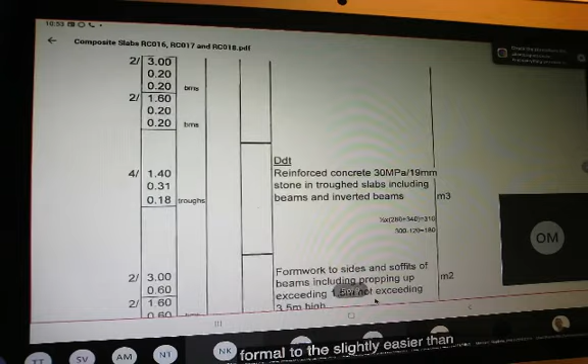All that we're doing is describing the size of this, and we know that the shape tells us it is 280 by 340 by 180, and we're giving the size of it, and measuring times 1, 2, 3, 4. That's all we are doing.

We're saying formwork to that, and those troughs are then how the contractor prepares them. We are not concerned. So we're saying that is the size 280 by 340 by 180 high, and there's 4 of them at 1 meter 400 long. That is how we would measure the formwork to that.

Slightly easier than measuring rib and block. And again, our reinforcement would be 2T.

Okay, we've got a couple of moments left for some questions. Some questions towards trough slabs and that? Anybody? No questions. Are we all happy? This is not too difficult. I don't see any hands. Nomta, you happy? Great stuff.